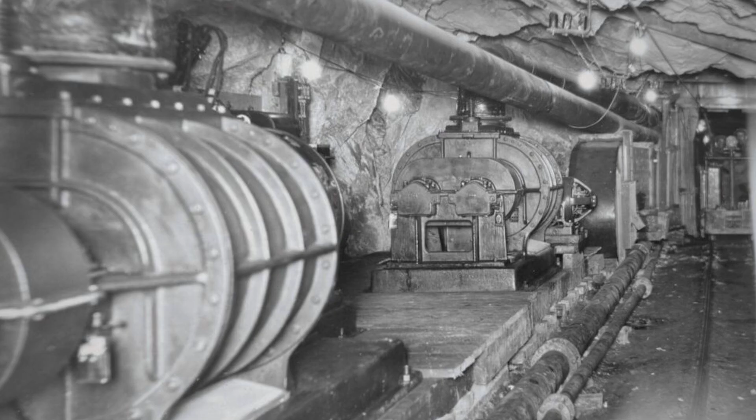Inside the suffocating heat beneath factory floors and steamboat decks, a single crack could turn routine into mass death. Steam boilers held water so pressurized that a sudden breach unleashed a blast more violent than artillery, expanding 1,700 times in an instant. For 19th-century boiler operators, every shift was a gamble with invisible energy they could barely understand, and survival came down to chance.

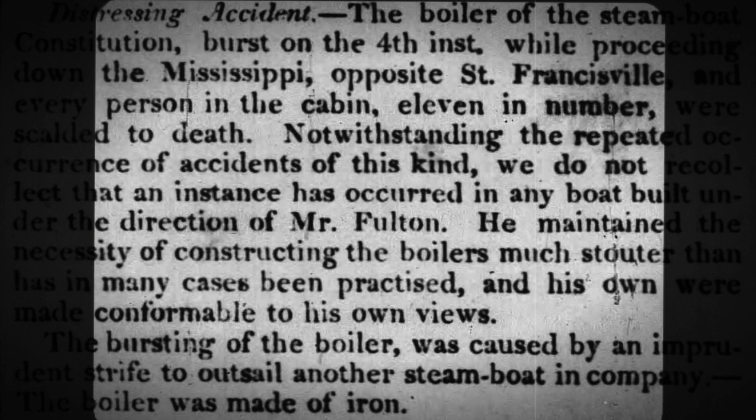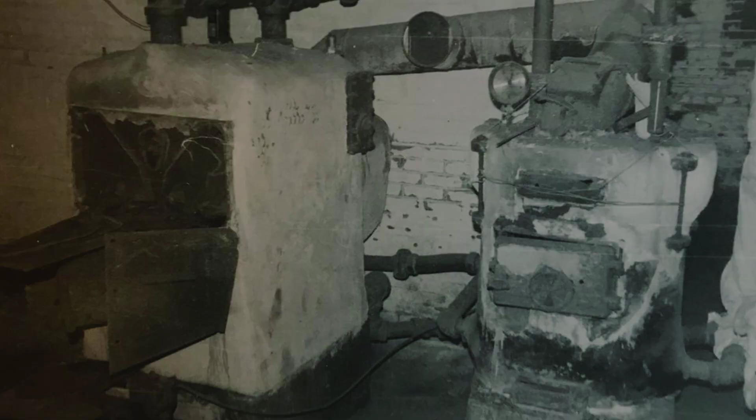The true reason their job was so deadly is not what you have been told. The physics behind it will change how you see every explosion that followed. Inside every boiler, the true threat was never the fire itself. It was the hidden energy packed into liquid water, forced far beyond its natural limits.

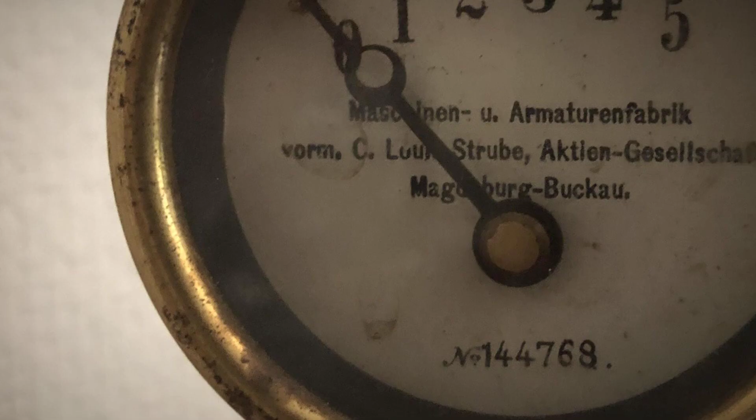At atmospheric pressure, water boils at 100 degrees Celsius, but inside a 19th century boiler, pressure could climb to 100, 150, even 200 pounds per square inch. Under those conditions, water stayed liquid at temperatures well above boiling, quietly storing energy like a loaded spring.

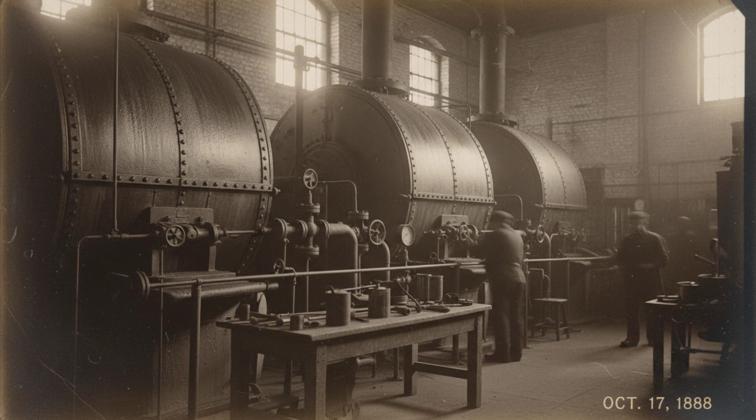1 liter of water, superheated and trapped under pressure, will suddenly expand to 1,600 or even 1,700 liters of steam the instant that pressure is released. This is not a gradual process. It happens in milliseconds. A single rupture or failed seam, and that invisible reserve flashes to steam, unleashing a force powerful enough to hurl iron plates hundreds of meters and turn factory floors into rubble. This is the physics that made every boiler a potential bomb.

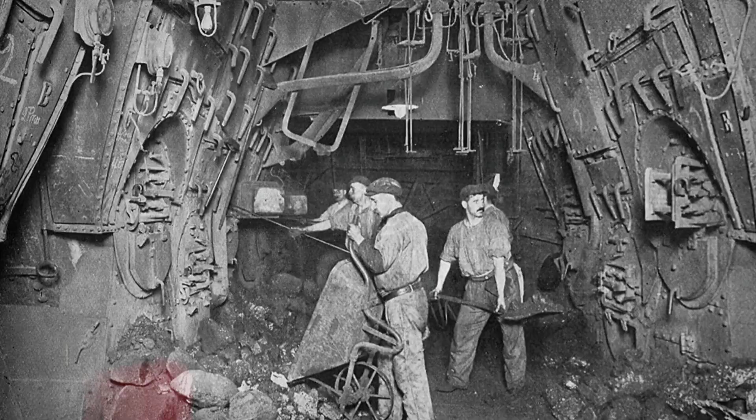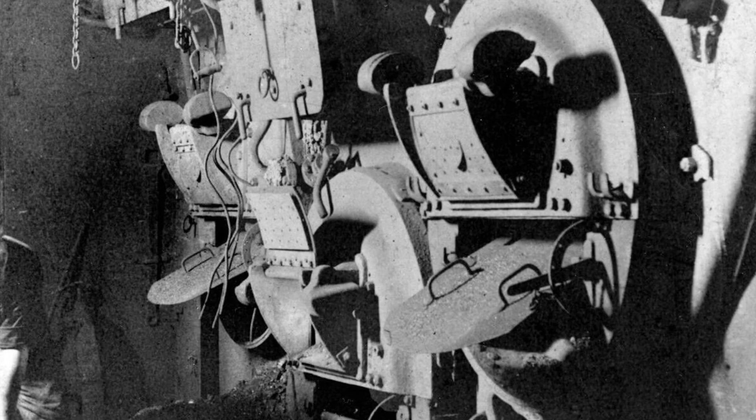For every operator working in the heat below decks or behind factory walls, the numbers were not abstract. They were the difference between routine and disaster, measured in fractions of a second and thousands of liters of expanding steam. Boiler operators worked in spaces that barely felt human.

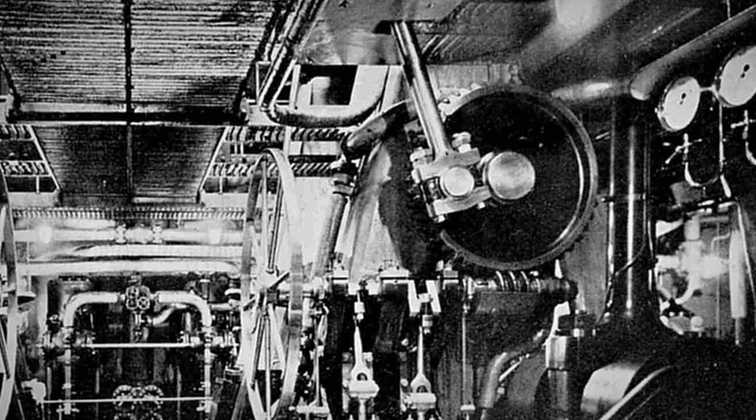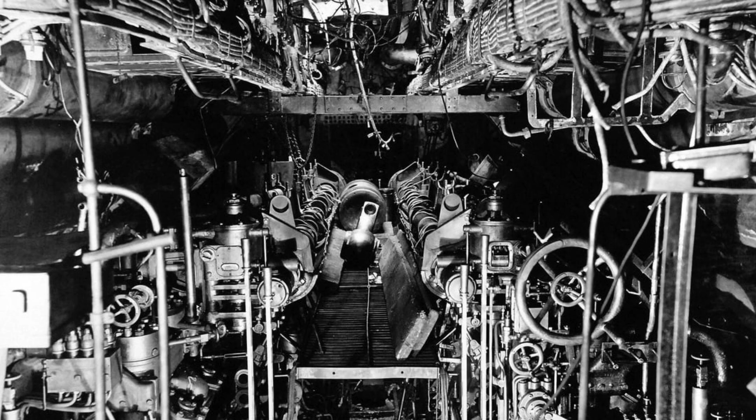Deep below the factory floor or tucked under the decks of riverboats, the boiler room was a world apart, stifling, dim, and always loud. Coal dust hung in the air, clinging to skin slick with sweat. The heat pressed in from every side, radiating off brick walls and the iron belly of the boiler itself. Breathing was heavy work. In summer, the air barely moved. In winter, the cold outside never reached this far down. These hidden, brutal spaces wore operators down, day after day.

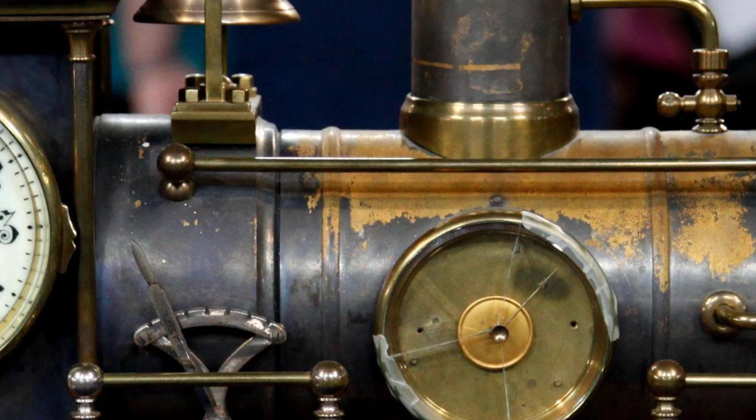Operators learned to read the room by instinct. Gauges were unreliable, so they listened for the hiss of steam, the groan of metal, the steady rhythm of the fire. Routine was survival. Shovel coal, check the water glass, tap the gauge, watch the fire's color. Each task had its rhythm, repeated hour after hour. Even the smallest change, a new creak or a sudden silence, set nerves on edge.

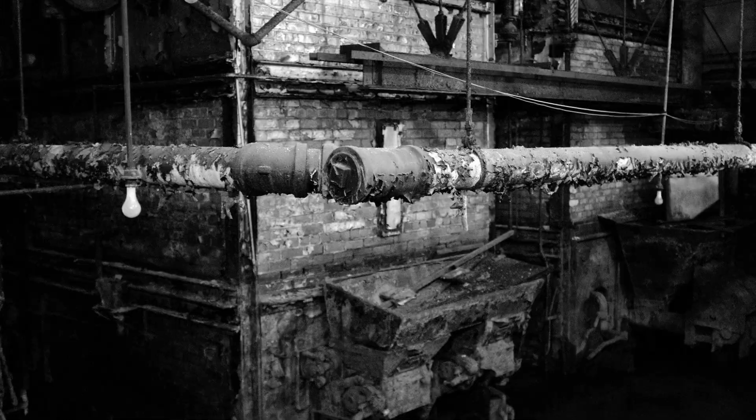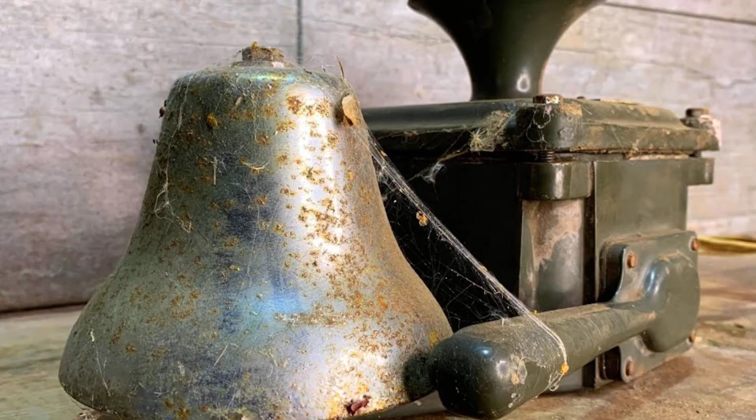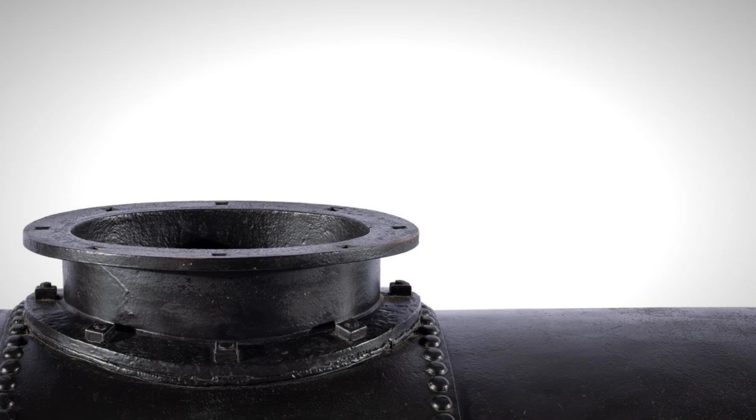Most never saw daylight during a shift. Meals were quick, eaten standing, hands still black with soot. Sleep came in short bursts, ears tuned for alarms that might never sound in time. The daily ritual became the only sure guide. Every operator knew the danger was close. They worked just feet from the boiler's shell, separated from disaster by nothing but iron, rivets, and habit.

There was no warning for the moment things went wrong. A life spent tending the fire could end in a single breath, with no chance to run. In these rooms, routine was both shield and trap, offering the comfort of habit right up until the instant it failed. A single decision could tip the balance from routine to catastrophe. It often began with something as simple as a slightly low water level in the gauge glass, easy to miss in the haze and heat.

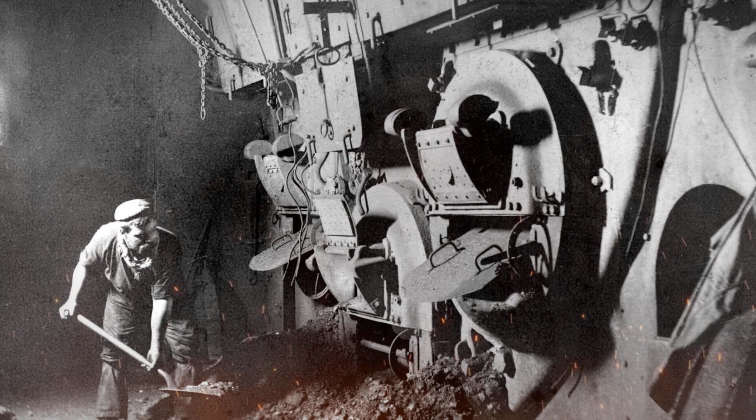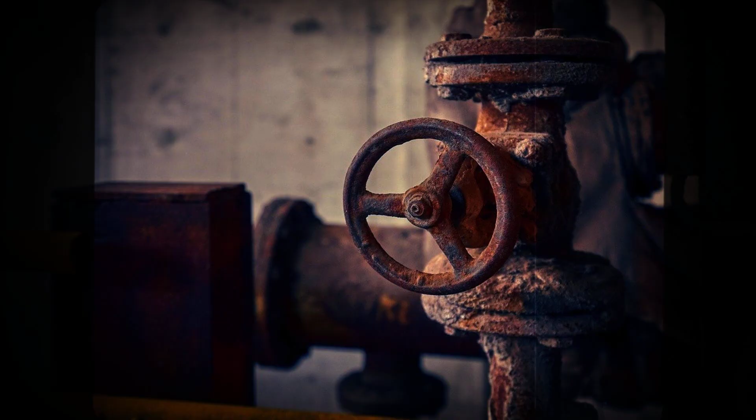The operator, pressed by the demands of production or the push of a river current, shoveled coal harder and fed the fire. The boiler plates glowed hotter, but the water inside did not rise fast enough to cover exposed metal. A valve, stiff from years of mineral buildup, refused to budge when checked. The pressure gauge, lagging behind real conditions, still read within the safe zone.

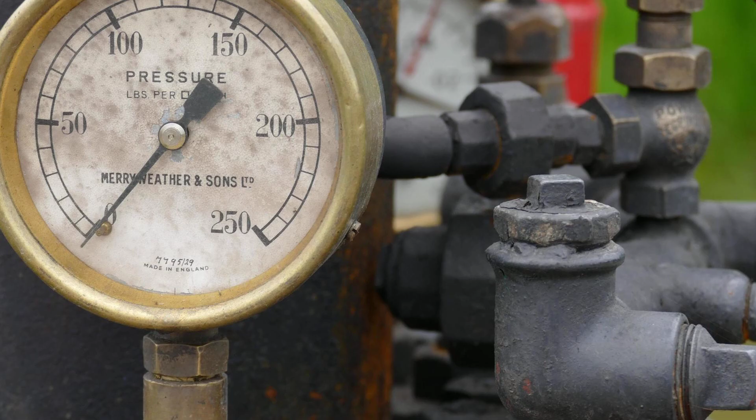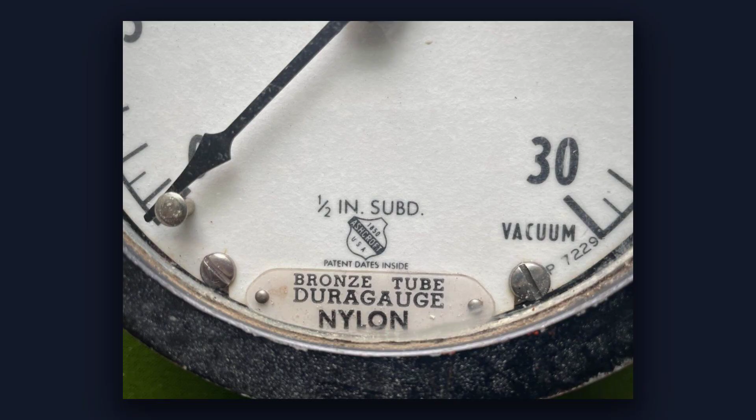But inside, the story was changing by the minute. As the fire raged, steam formed faster than it could escape. The pressure inched upward, but the gauge needle barely moved because its mechanism was sticky from age and grime. The operator, trusting the instrument, kept firing.

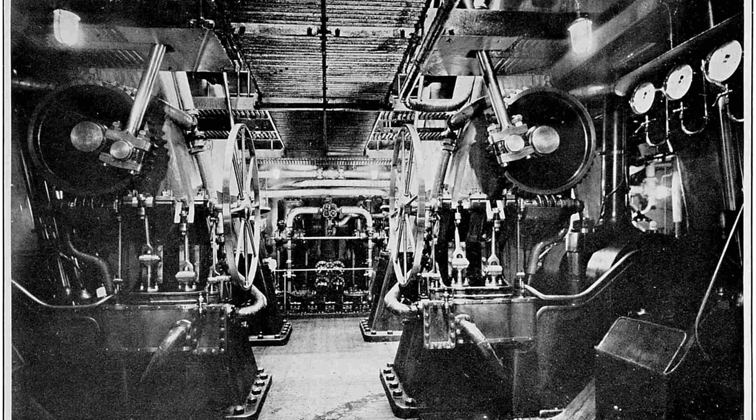An unexpected draft swept through as a door opened above, feeding the flames and pushing the temperature even higher. The water, now dangerously low, left parts of the boiler shell exposed to direct heat. Metal began to blister, unseen. Suddenly, the load shifted. A machine on the line shut off, or a paddle wheel eased for a bend in the river. Demand for steam dropped, but the fire did not.

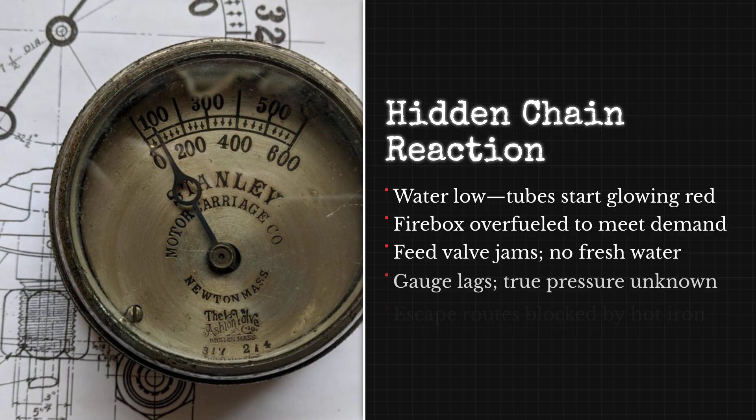Pressure spiked in seconds. The relief valve, meant to be the last defense, was stuck or weighted down to prevent steam loss. In that instant, the margin for error vanished. The operator, watching dials that lied, had no warning. The chain reaction was complete. Overheated metal, hidden pressure, no escape route. Disaster struck in the space between one heartbeat and the next.

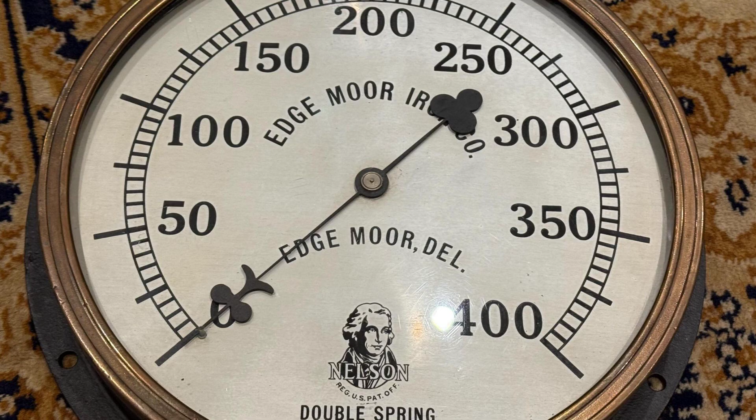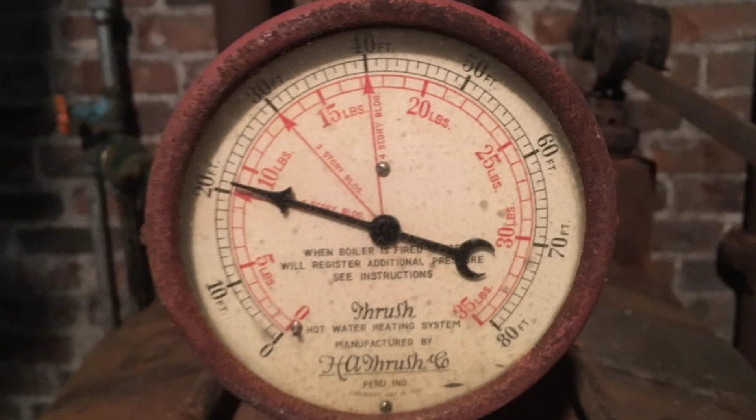Pressure inside a boiler could race from manageable to murderous in seconds, triggered by jolts no operator could predict or control. A sudden change in steam demand, a machine shutting down, a paddle wheel easing off for a river bend, meant the system no longer drew off steam at the same rate. The fire, still raging under the shell, kept feeding energy in, but nowhere for it to go. In that instant, the pressure did not just rise, it spiked.

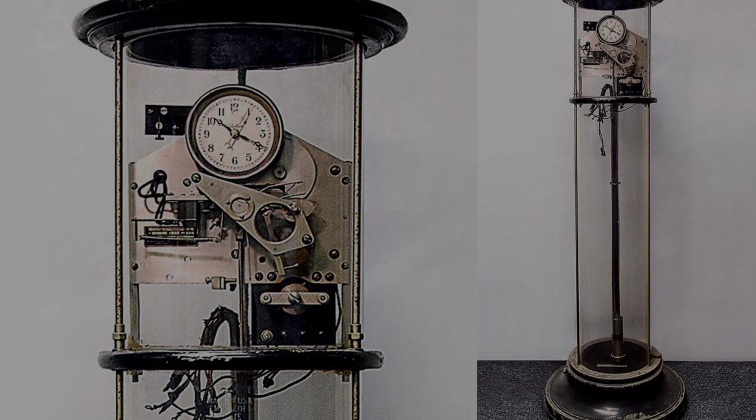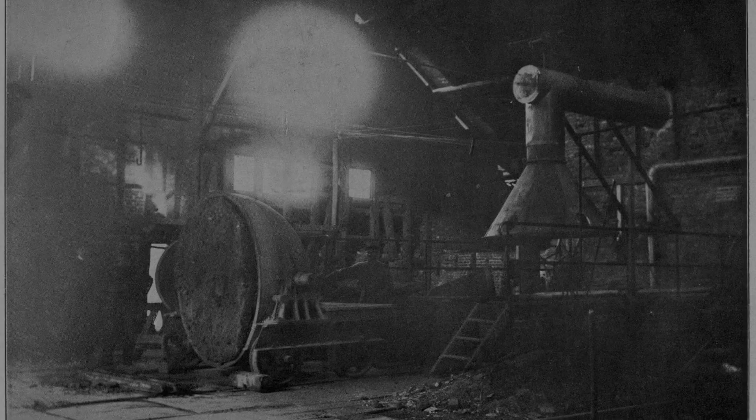Early 20th century tests, built to mimic these 19th century disasters, showed pressure could leap from safe to rupture in under a minute, sometimes in half that time. Environmental surprises made things worse. A gust of wind down the chimney, a door thrown open, or a shift in outside weather could change the draft in a heartbeat. More air meant hotter fires, and hotter fires meant more steam, whether or not the machinery needed it. Operators, buried below decks or behind brick walls, could not see these changes coming.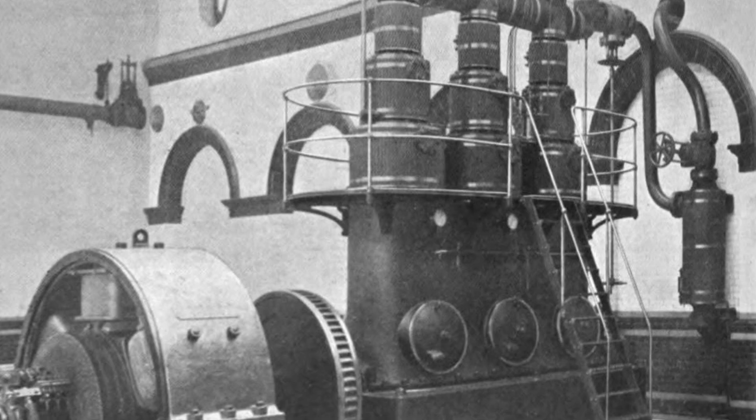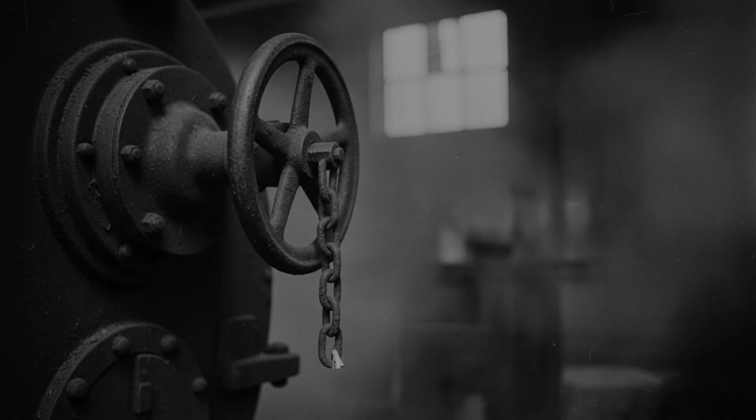They might feel the temperature climb or hear the fire roar louder, but by then, the pressure wave was already building. There was no buffer, no real warning. The gauges lagged behind reality. The sound of the fire masked the hiss of rising steam. When the load shifted or the draft swung, the boiler's internal balance tipped from routine to red alert in moments. By the time an operator sensed something was wrong, the margin for action was gone. The system was locked on a course to failure, and the next link in the chain was always the shell itself.

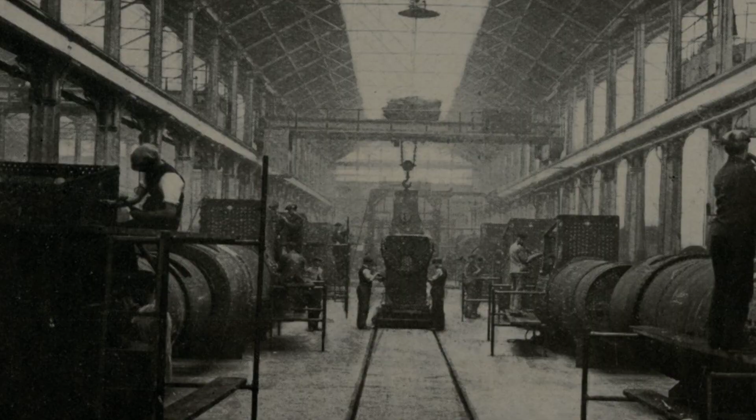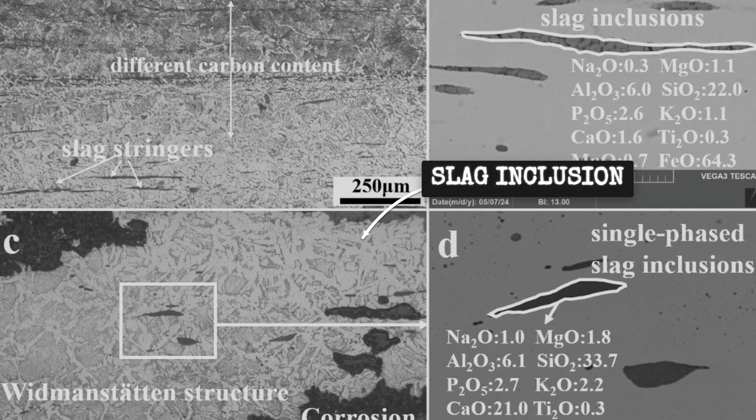Iron plates inside a 19th century boiler rarely failed without warning, but the warning signs were invisible to the naked eye. Deep within the metal, tiny flaws, slag inclusions left over from imperfect smelting, and microscopic voids in the iron waited for years under relentless pressure. Each time the boiler was fired and then allowed to cool, the metal flexed and contracted, concentrating stress at every rivet hole and seam. Over time, those weak points grew brittle.

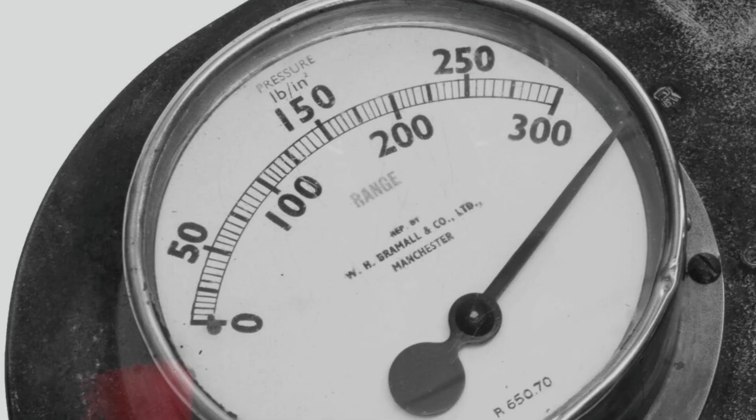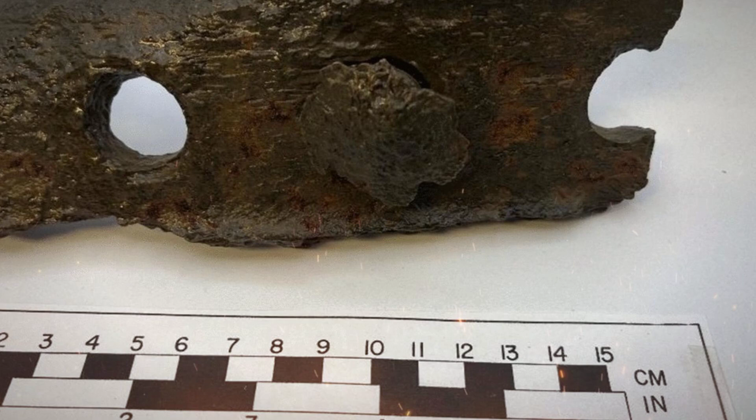When pressure spiked, the weakest spot gave way first. A crack would shoot outward from a rivet or along a seam, often following a line of slag or a thin patch in the plate. Hoop stress, the force trying to burst the cylinder apart, was twice as high as the force running lengthwise, so cracks raced around the barrel like lightning. In less than a blink, a hairline fracture could rip open the shell, peeling back iron in jagged, torn sheets and unleashing the full fury trapped inside.

The blast tore through everything in its path. In factories, the iron shell split open with a sound like thunder, sending a shockwave that heaved the floorboards and buckled brick walls. Heavy machinery was flung aside, timbers snapped, and glass shattered in a rain of shards. Workers on the floors above felt the ground lift beneath them before the ceiling gave way.

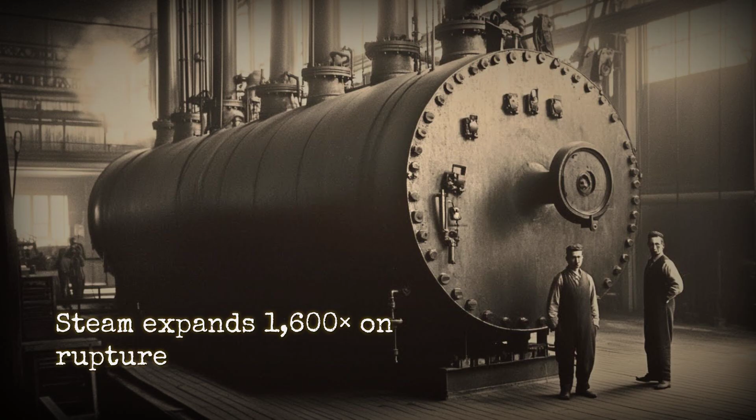On riverboats, the force ripped through wooden decks, hurling red-hot fragments and scalding steam across crowded cabins. Deck planking splintered into jagged missiles, and the hull split wide, spilling boilers and cargo into the river. Operators, standing just feet from the point of rupture, were struck down instantly, caught in the first rush of steam and flying metal, with no chance to escape.

Survivors described the aftermath as bodies thrown clear, smoke and steam choking the air, and silence falling as the blast wave faded. In a matter of seconds, routine had turned to ruin, and the hidden power of steam had claimed another set of lives.

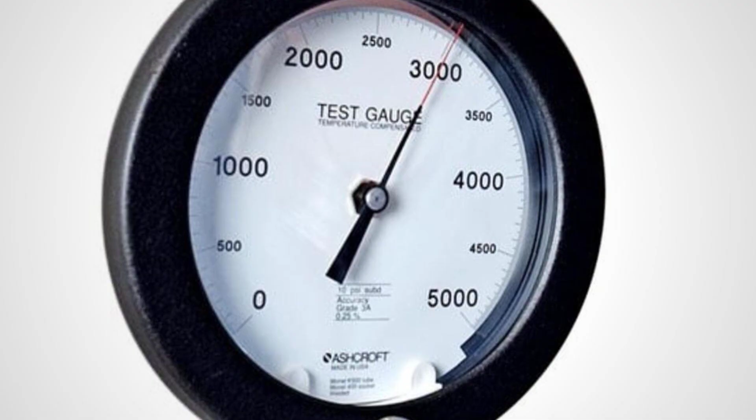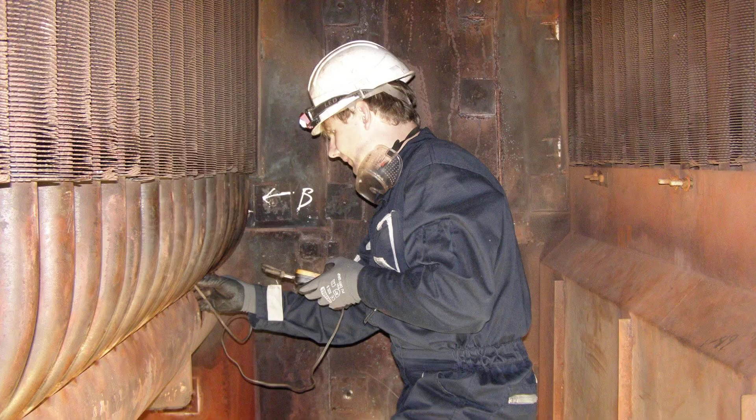Steam still powers cities and industries worldwide, now under higher pressures than ever. Every safety code is written in the aftermath of tragedy. The lesson endures. Invisible risks demand relentless vigilance, because progress without precaution always puts lives on the line. What safeguards would you demand today?